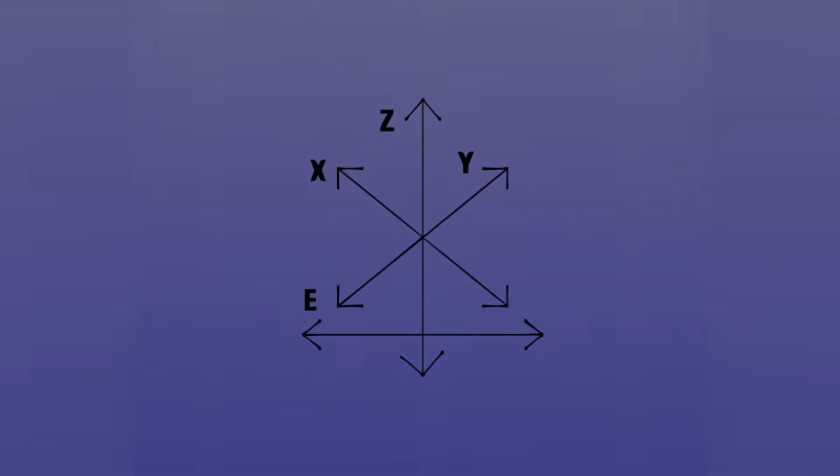Horizontal holes often present a bit of a problem in 3D printing. As the 3D print builds up above the midpoint of the hole, the overhang becomes increasingly shallow, until at the top of the hole it becomes greater than the printer can manage, and you get bits of filament hanging down ragged. Fortunately, the layers above that often succeed in bridging over the hole left by the failed overhang, so that the entire print is not destroyed.

But that still leaves you reaming out crud from the holes in a pretty ragged look. A common workaround to that is to add a bit of a teardrop at the top of the horizontal hole to keep the overhang small enough to print cleanly. That does, of course, increase the workload in CAD a little bit to design the teardrop shape.

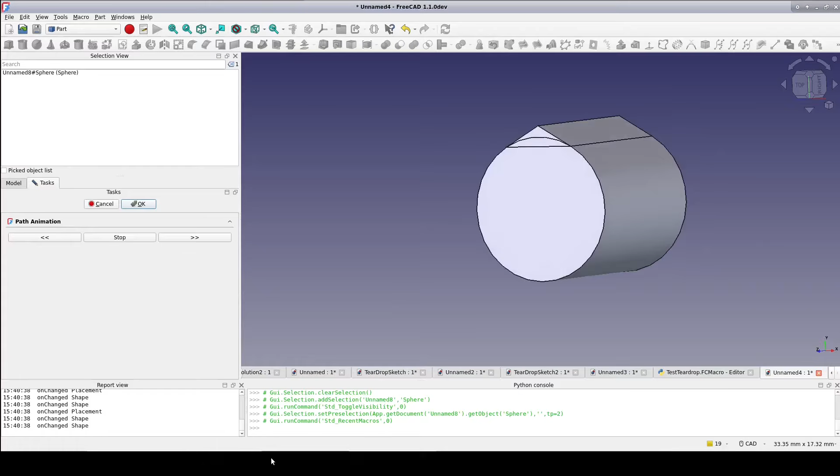A little while ago on Reddit, I saw a post about an add-on module for the part design workbench called Fused Filament Design. I placed a link in the description below. In part design, it allows you to select a hole feature and modify it with the teardrop shape.

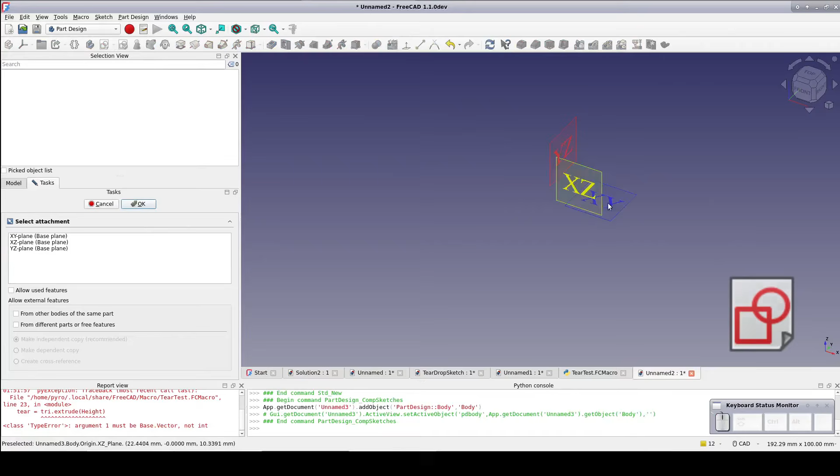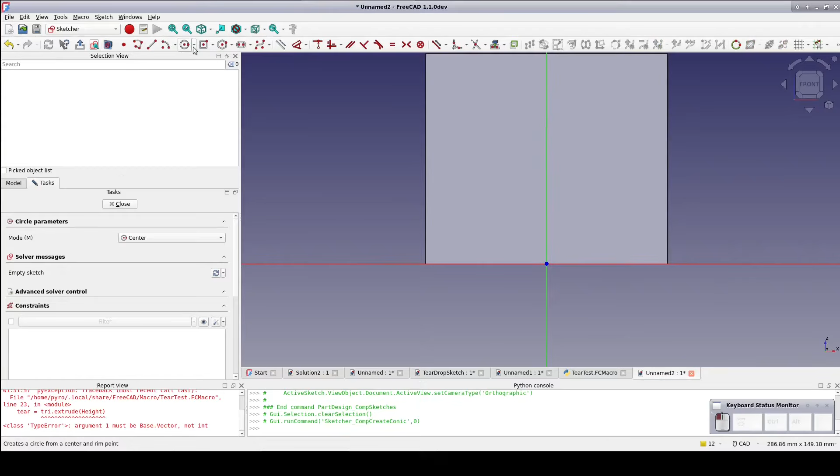Let me show you. Start in part design. Create a sketch on the XZ plane. Just a simple centered rectangle. The exact dimensions don't matter. Pad the sketch to 100 mm to give us a vertical surface. Select the vertical surface and create a new sketch. Drop a circle on it somewhere. Doesn't really matter where, doesn't really matter how big, let's say 10 mm in radius.

Close the sketch. Select the sketch and the hole tool. Set the hole to be through wall and a diameter of 20. Unsurprisingly, there's our hole. Now select the hole feature in the tree and the hole wizard from the Fused Filament Design. In the wizard, select Add Teardrop Shape. I want the 120-degree teardrop angle. Click OK. There's the teardrop.

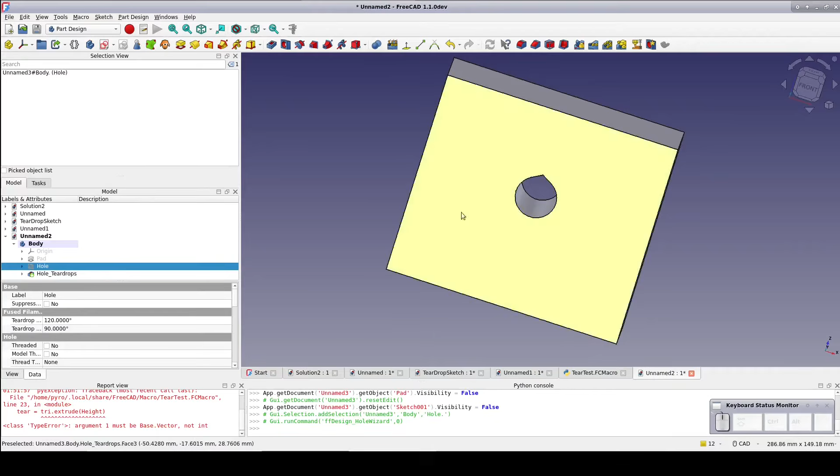Very simple, very easy. Looking in the Hole Teardrops feature, I can see that it accomplishes this by creating a sketch. Open the sketch to see what it's doing. It looks fairly simple. In principle, it creates an arc with the radius of the hole. Then above that creates a V shape with endpoints tangent to the arc. It sets a 120-degree angle constraint on the V shape to create the teardrop. Presumably within the teardrop feature, this created sketch gets pocketed into the body.

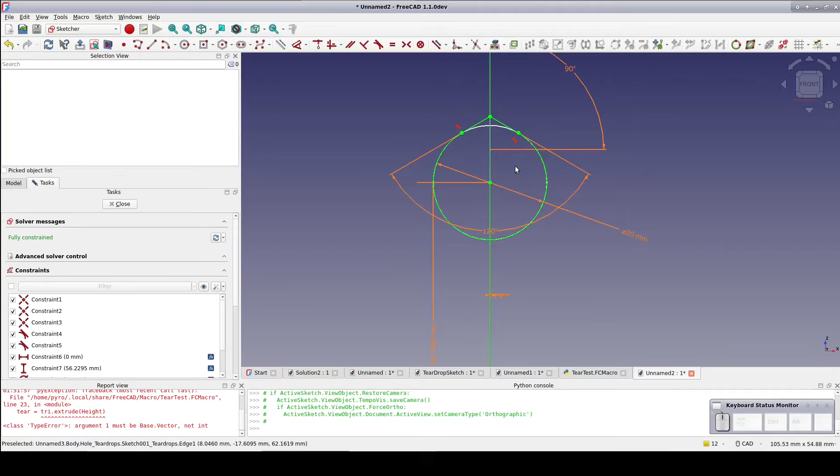But I personally prefer the part workbench. In the part workbench, we don't create a hole feature. We create a cutting tool in the shape of our hole and Boolean cut it from the object we want to put the hole in. I suppose I could just take the code that generates the sketch and turn it into some kind of macro or tool for the grab bag. The Fused Filament Design module is, after all, under the LGPL.

But I believe it's going to be much cleaner to just compute the geometry of the cutting tool and create it directly. This process is somewhat simplified since I already have the correct shape available for analysis. I just need to do that analysis and use it to inform a compute shape function. For the first step, I'm going to recreate the sketch only with the arc centered on the origin.

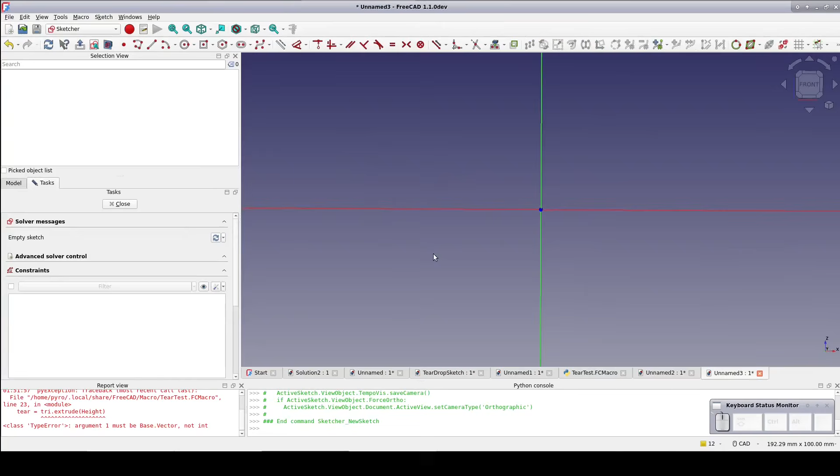Starting in the part workbench, create a sketch on the XZ plane. Create a centered circle 10 mm in radius. That's a fairly large hole, but 10 is a nice round number for seeing mathematical relations. I use the polyline tool to create the teardrop extension above the circle, and I'll set the angle to 120 degrees.

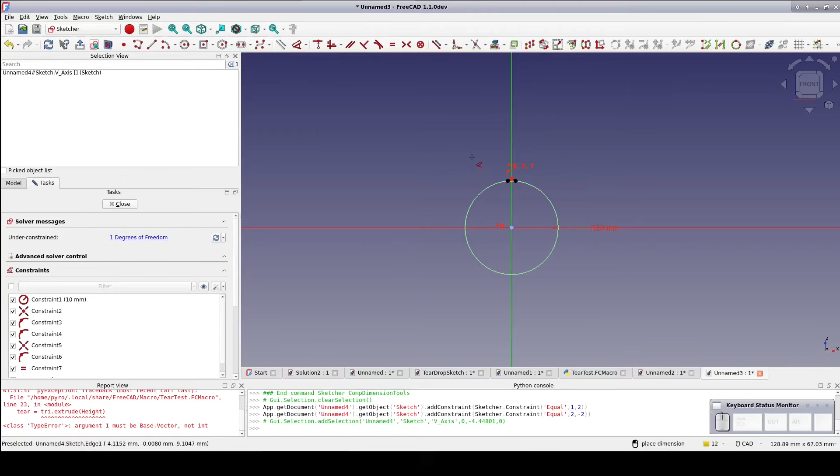There seems to be some kind of a bug here. Sometimes when I try to set an angular constraint, it collapses the whole thing down like this. I'm not sure what it is, but I do know that if you right-click, it'll set it back to right and you can try again. Such is life when you're using a development version.

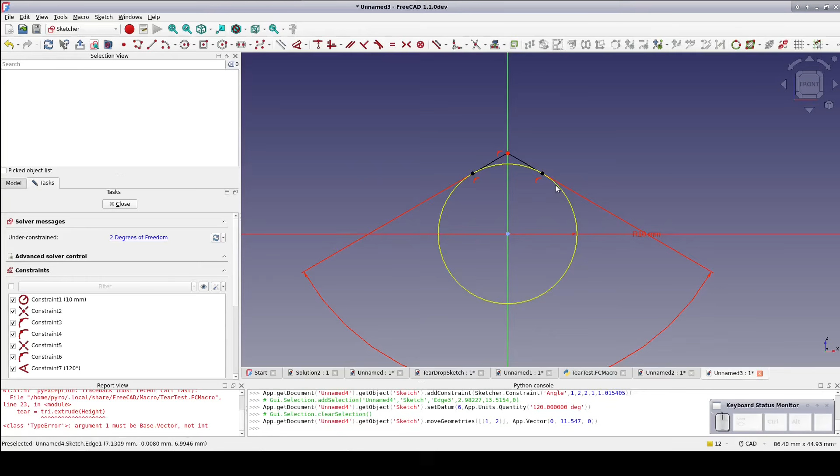I'll set the two legs of the V shape to be tangent to the circle, and that's a fully constrained sketch. Obviously this couldn't be extruded without some trimming, but I don't intend to extrude this, it's just for analysis. The first thing I see is that the tool shape should be easily enough generated by creating a cylinder and an extruded triangle and fusing them together.

I'll switch to construction mode and put in the base of the triangle. It's perfectly fine that it's inside the circle. The fusion will take care of that. But since I'll be creating this shape, I'm not going to be able to rely on a tangency constraint.

I need to compute the position of the base of the triangle when I'm computing the shape. Dimension the vertical distance from the base of the triangle to the origin of the circle. I'm going to make this a reference constraint so I can just have a look at the value. I'm going to need a way to compute that distance, and it occurs to me: this is all based on a circle, and where there are circles there is trigonometry.

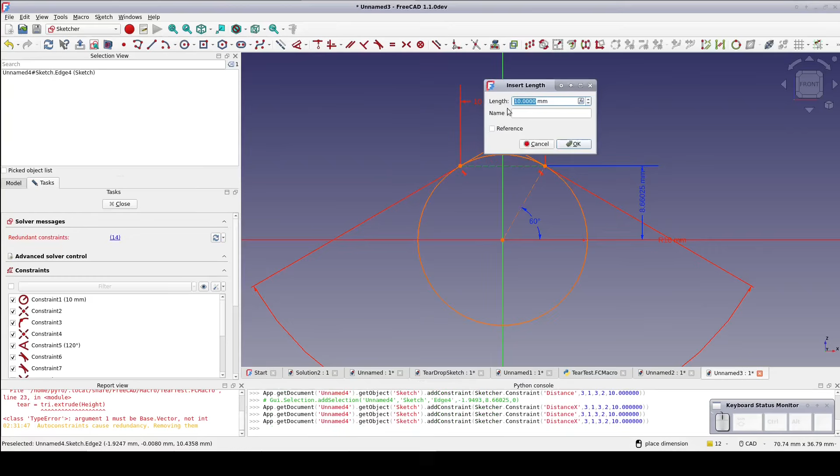So I'll drop in a construction line from the origin to where the triangle meets the circle. I'll create a reference constraint for the angle of that diagonal construction line, and it's 60 degrees. Suspiciously, that's half of the angle of the teardrop. Now I'll take a reference constraint for the length of the base of the triangle. Also suspiciously, it turns out to be 10 millimeters, the radius of the circle.

So it looks like I can get the height of the base above the center as the sine of 60 times the radius. Knowing the length of the base and the height of the base will allow me to compute the two lower points of the triangle. Now I just need to get the height of the peak.

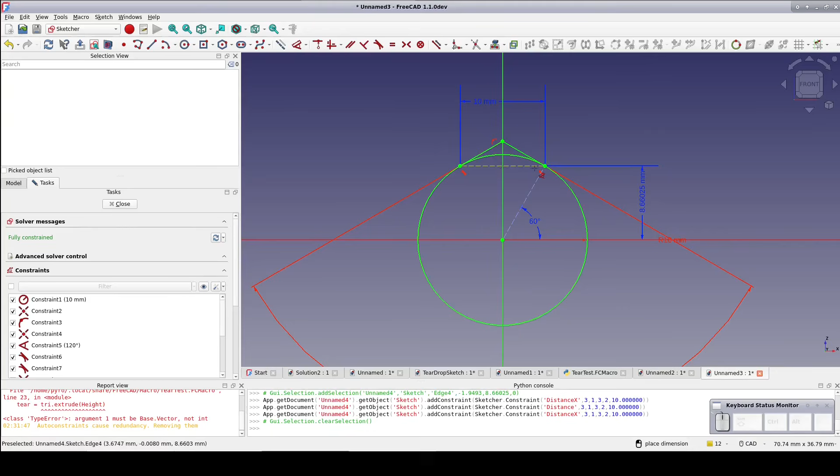Adding a reference angle constraint to the triangle, I see that I get a measure of 30 degrees. That's either half of the 60 degrees or it's the complementary angle. But either way, that gives me my answer. The triangle is bisected and the base angle is 30.

So I know the length of the base, and that half of the length will be the base of one of the right triangles. So if I take tangent of 30 degrees times that length, I get the height of the peak of the triangle above the base. Since I already know the height of the base, I can add those to compute the vertex of the triangle.

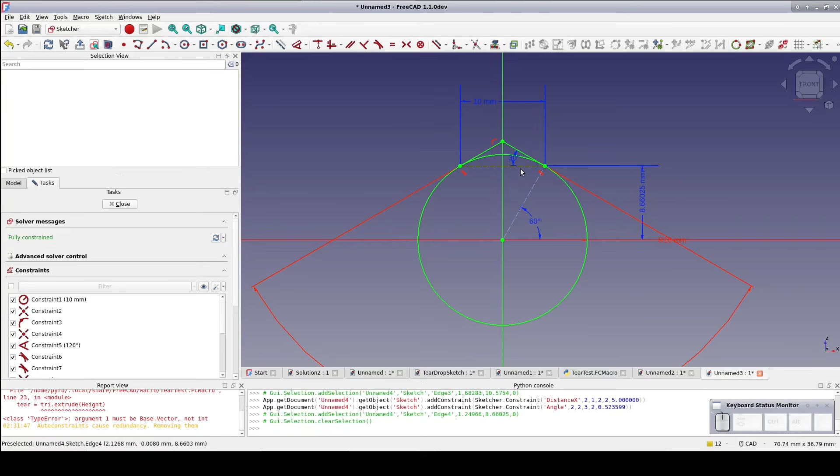Next step, let's try that out in a macro. So here's a simple macro to reproduce the teardrop. To start, define a few angles since the trig functions in Python operate on radians. Define degree 30 to be pi over 6. 2 pi radians is a full circle. Pi radians is a half circle. Pi over 2 is 90 degrees, and we need a third of that. So pi over 6 radians.

Clearly degree 60 is twice that, so I'll just set it to degree 30 times 2. Since I'll be using the sine a few times, I'll pre-compute that as sine 60, which is just math.sin(degree 60). For testing, I'll hard code the radius to 10 millimeters and the height to 50 millimeters. First, create a cylinder of that radius and height. The part module includes a function that, given a list of points represented as vertices, creates lines from point to point to create a wire. Define that list as polypoints.

The first point x value is going to be radius over 2 from the origin. We established that the base of the teardrop is the radius of the circle. It's bisected by the y-axis, so half of that. The y-coordinate is sine 60 times radius. We're drawing this on the xy plane, so z is 0. Now over to the other side of the triangle. Since it's just mirrored across the y-axis, the x will be negative radius over 2. The y is the same as the first vertex, and so is the z.

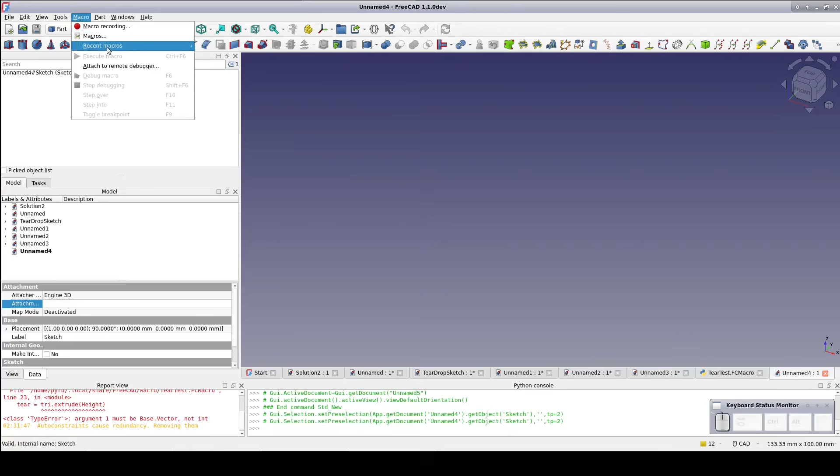That looks good. This video is already starting to run long, so in the next video I'll generalize this macro and convert it into a proper feature to be included in the grab bag.